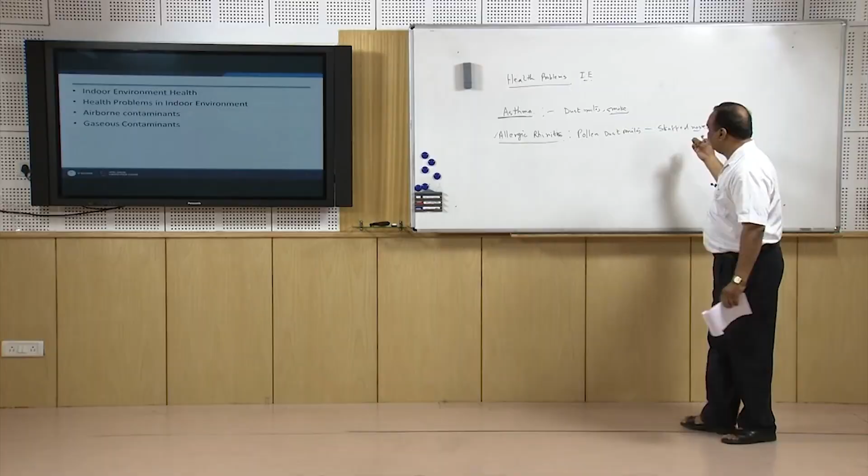Another is allergic rhinitis. This is also caused by pollen and dust mite. In this disease there is a stuffed nose. You must have observed that sometimes when you are sitting in an air conditioning environment, you have a stuffed nose. When you go out, things become okay.

Now the third one is contact dermatitis. In this disease, there is dry skin and itching, and scales on the skin are formed. So this type of disease also may take place if the indoor environment is not healthy. In addition to this, eye and nasal irritation.

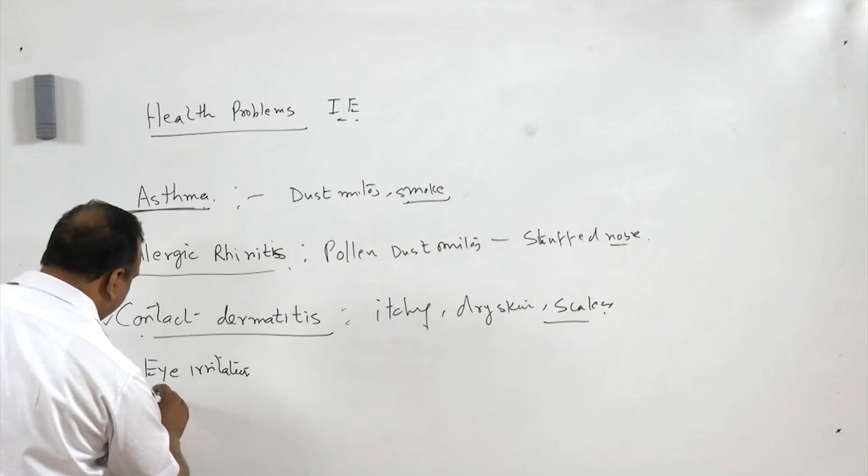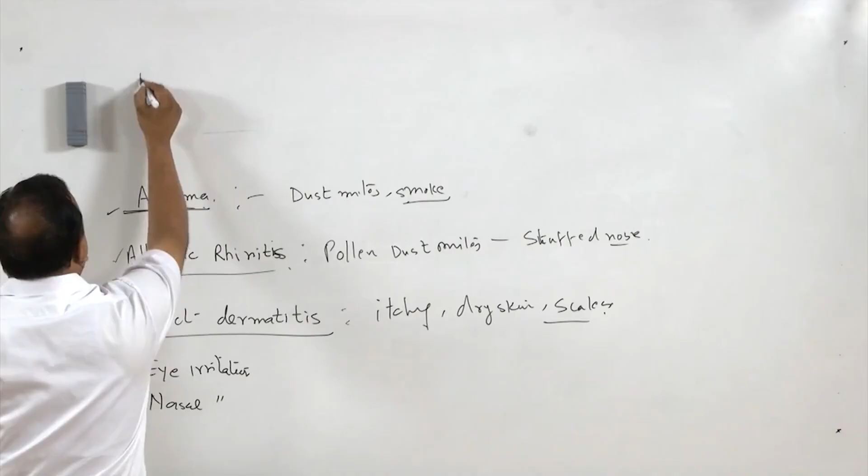Further, there is a disease which is known as Legionnaires' disease. This spreads through bacteria and it has pneumonia-like symptoms. It's a serious, deadly type of disease, with symptoms like pneumonia and fever. Organ dysfunction can also take place, and this is due to the bacteria.

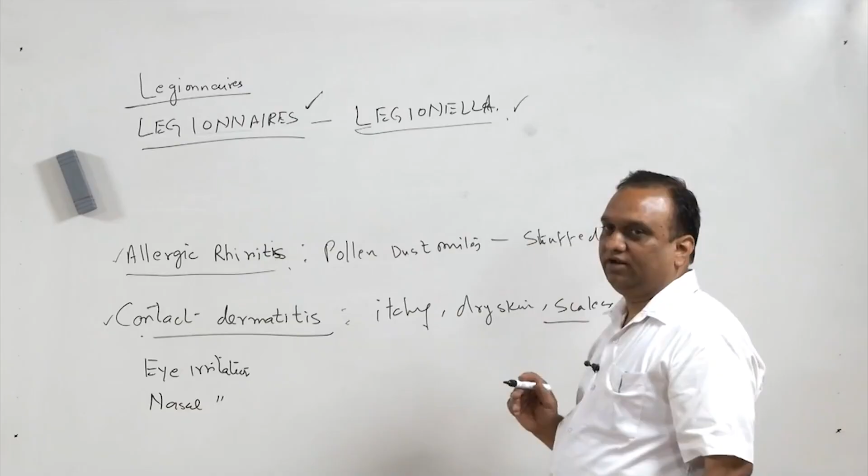This bacteria grows in fresh water. So the favorable ground for this bacteria is condensate water in the air conditioner or in the cooling tower, especially in the centralized cooling system, where a number of cooling towers are used for cooling water in a condenser. There also this bacteria can develop, and infection with this bacteria causes this disease, with high fever and organ dysfunction.

Now, in addition to this, there is Pontiac fever also. Pontiac fever is a flu-like illness. When you are sitting in the environment, you feel that you have been infected with the flu. These are some of the diseases, not all, which you may catch when you are sitting in a controlled environment.

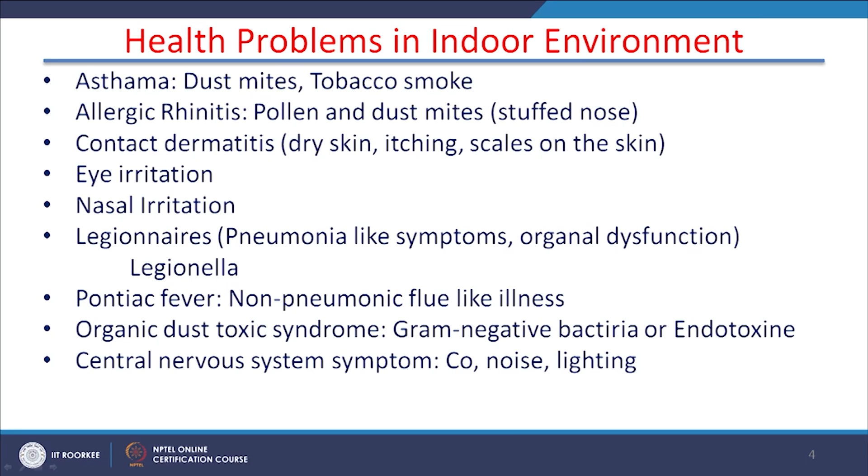So you, as a person, should know about these diseases because they come from the controlled environment. Sometimes we catch some disease, but the source is not known to us. For these diseases, the controlled environment can be one of the sources. Now there are a number of contaminants in the controlled environment which affect environment health, and number one is airborne contaminants.

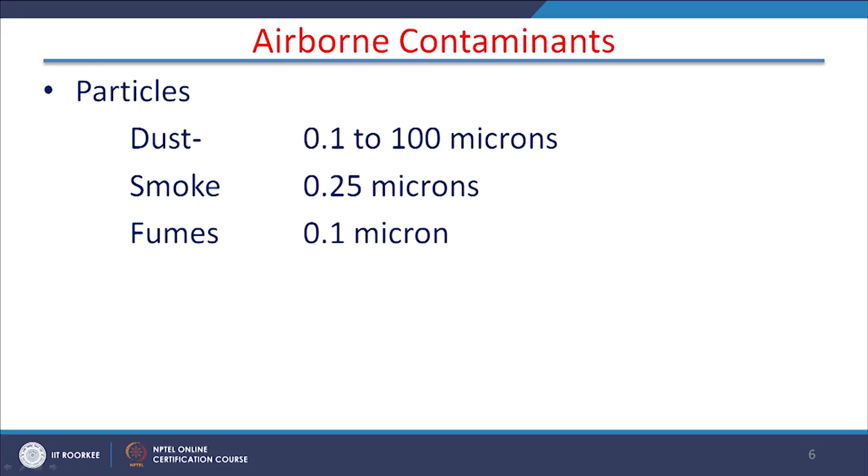Airborne contaminants are spread through the air. They are particles of dust, normally ranging from 0.1 to 100 microns. Smoke particle size is approximately 25 microns. A micron is 10 to the power minus 6 meter. And fumes, the size of the fumes is approximately 0.1 micron.

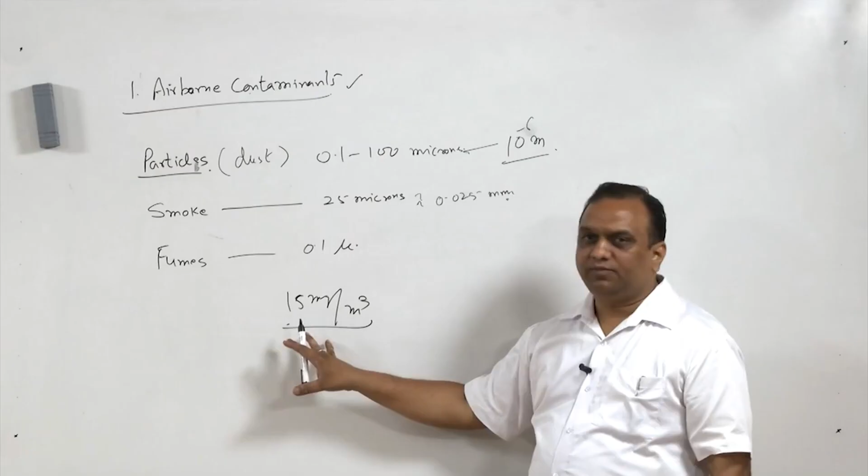Now dust is the major constituent of airborne contaminants, and the maximum permissible amount of dust which one can take in with breathing is approximately 15 mg per meter cube. Actually air should be dust free, but if you want dust free air, a lot of arrangements have to be made. Then you will have to go for clean air and filters have to be provided.

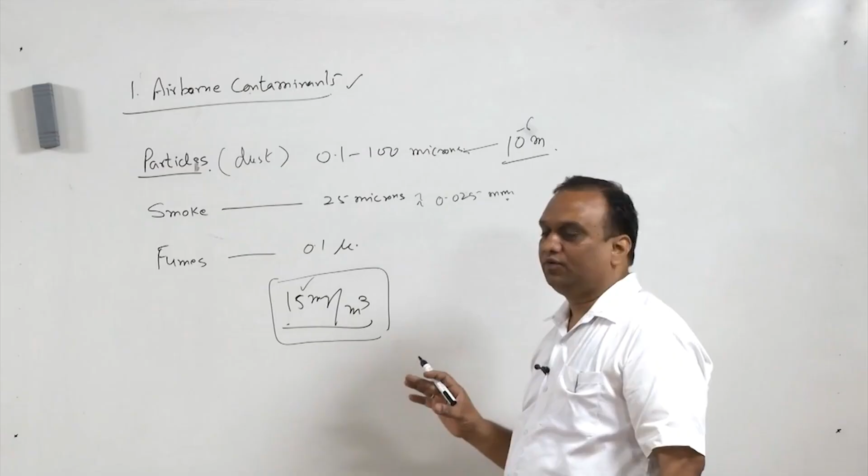But if the presence of dust is less than approximately 15 milligrams per meter cube of air, it is acceptable for normal air conditioning, not the special type of controlled environment. Bioaerosols are also there.

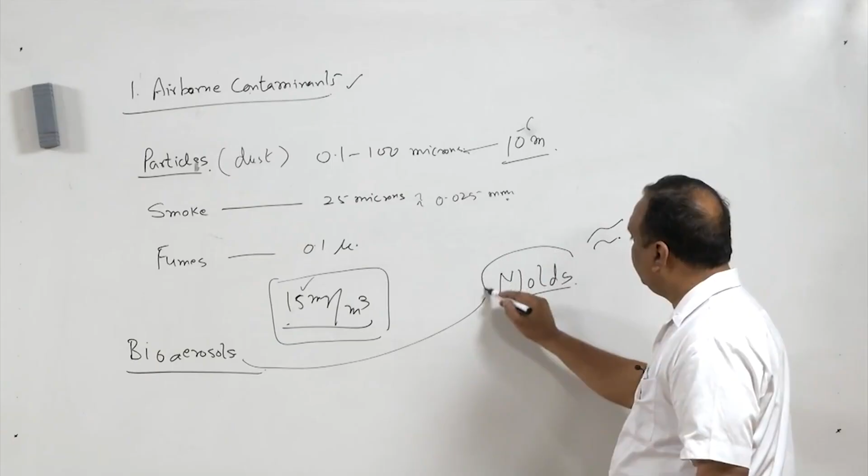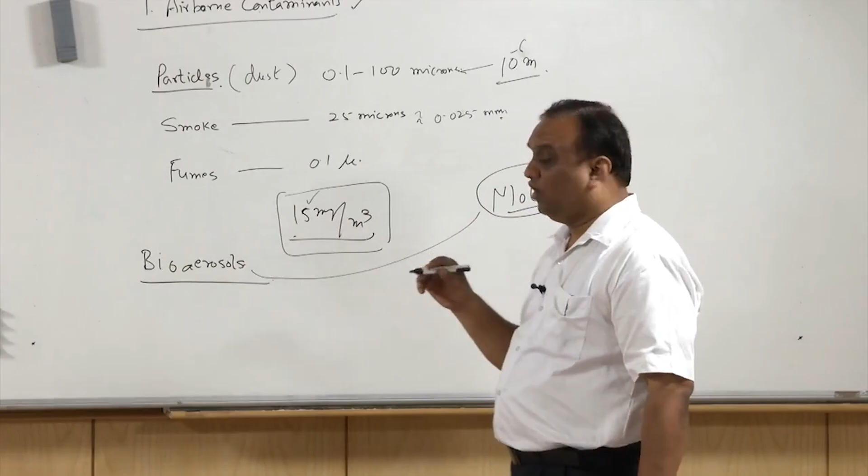In this bioaerosol comes the molds. Mold is a major problem in air conditioned systems. It is a sort of fungus which has a filamentous structure, and it develops in confined spaces, air conditioned spaces. You must have also seen in those systems which are centrally air conditioned and air conditioned for a long time, along the wall or in many places or inside the duct also, the mold develops. So this is a very common problem in air conditioning systems.

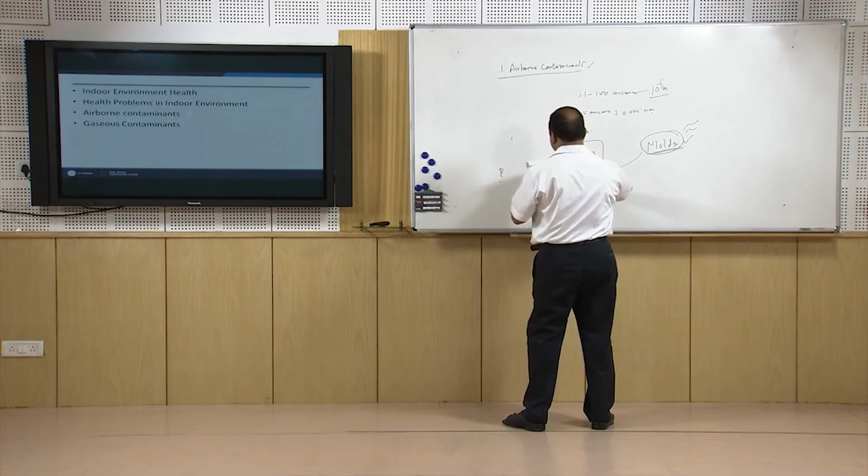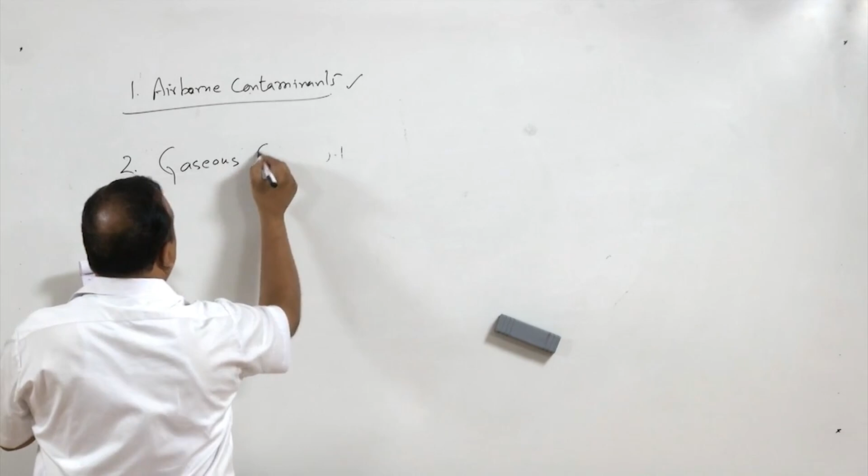So these airborne particles consist of bacteria, fungi, protozoa, algae, and combinations of these. Now after airborne contaminants, there are gaseous contaminants which affect indoor environment health. Gaseous contaminants. Now gaseous contaminants are mainly VOC, that is volatile organic compounds. Now, volatile organic compounds are very harmful to human health, right?

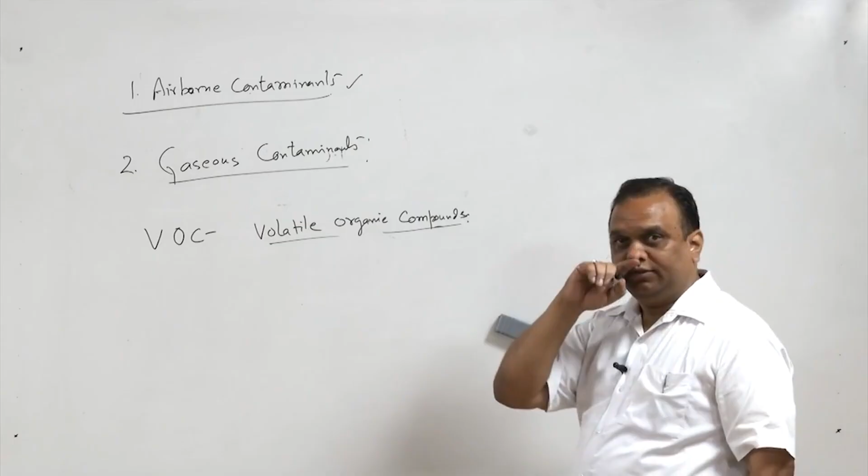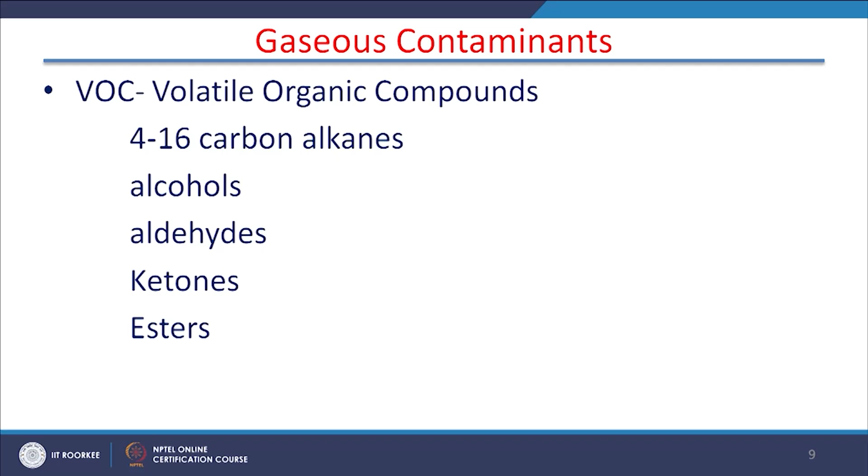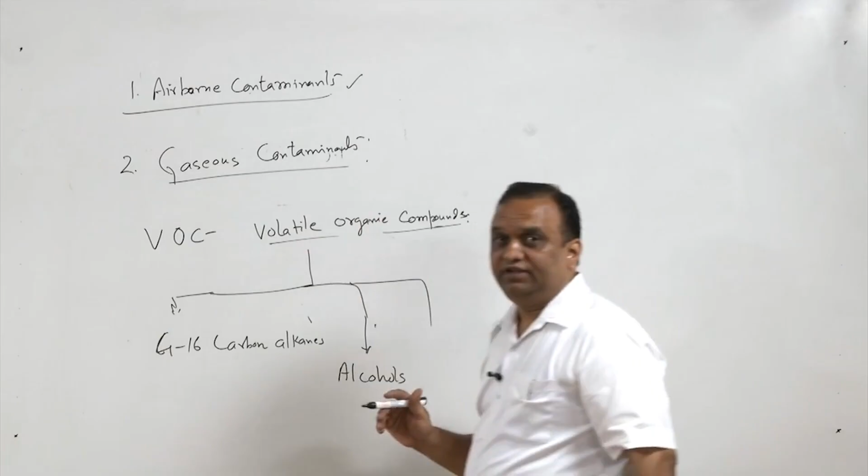So, in any building, especially where a source of volatile organic compounds is there, they have to be removed. They make the air sick, and a number of volatile compounds, for example, 4 to 16 carbon alkanes, different types of organic alkanes, alcohols, aldehydes, ketones, esters. So there are many organic compounds, and when the vapors of these volatile compounds are mixed with the room air, it affects the quality of air which is being circulated in the room.

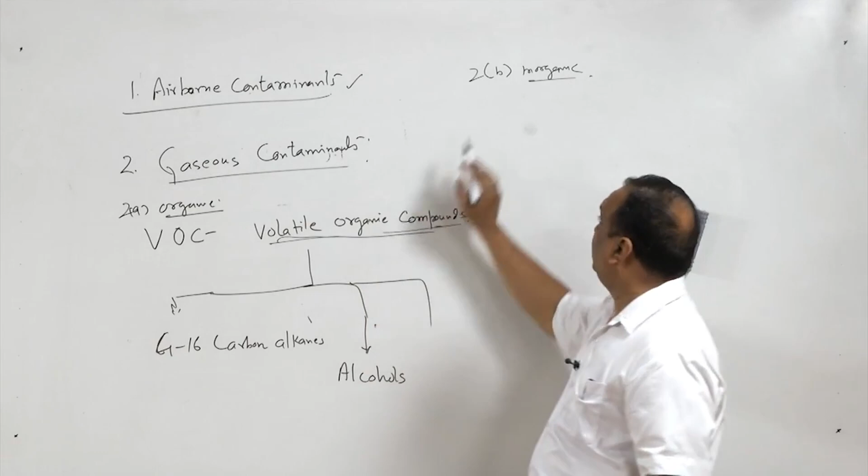Now, the second one is gaseous air contaminants, inorganic. Now, the gases: 2A, these are organic, and some are inorganic gaseous compounds, so 2B inorganic. So, organic gaseous compounds, that is the volatile organic compounds. Then inorganic: the first and foremost is carbon monoxide, ammonia, carbon dioxide, ozone, sulfur dioxide, and many more.

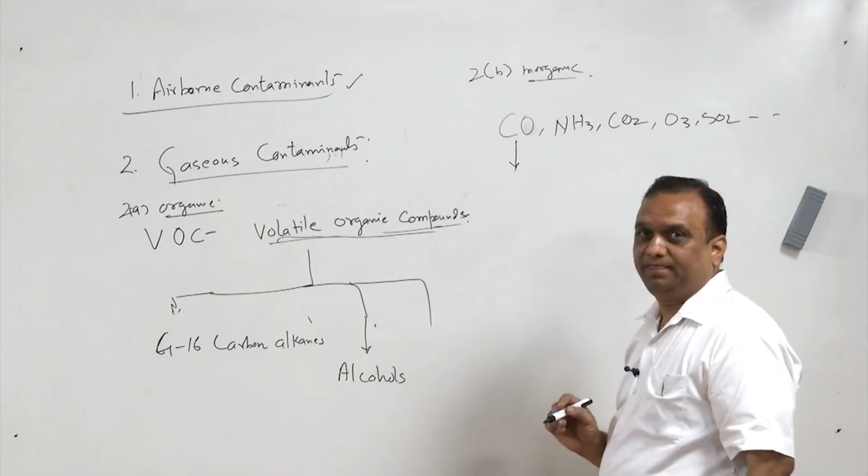Now, carbon monoxide is an odorless and colorless gas, and the permissible concentration of carbon monoxide is 50 ppm, parts per million. So, carbon monoxide in the air should not be more than 50 ppm. Carbon dioxide can go up to 400 to 500 ppm, and it can go up to 700 also. Outside air nowadays in metropolitan cities is quite polluted, so it can go, but in any case it should not exceed 1000 ppm, because at 1000 ppm it will affect the health of the indoor environment and make the air sick inside the room.

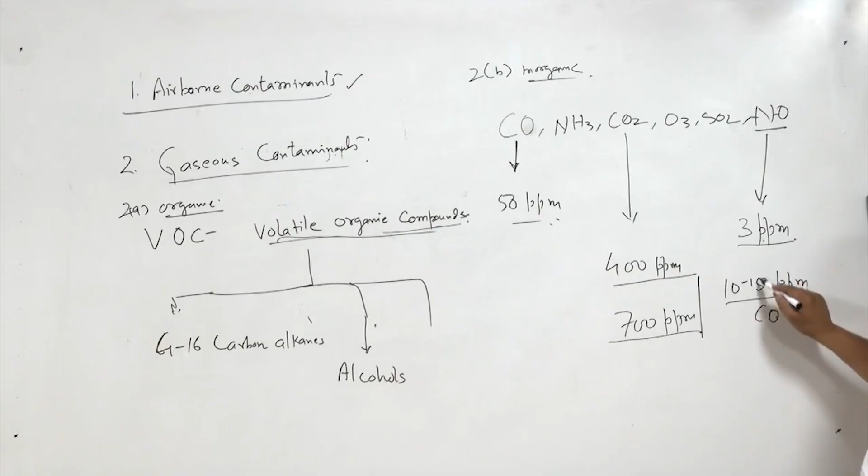Now, one inorganic compound is nitrous oxide. If there is 3 ppm of nitrous oxide, then it is equivalent to an exposure of 10 to 15 ppm carbon monoxide. So, it is more fatal than carbon monoxide, we can say 5 times. Only 3 ppm is permitted; for carbon monoxide, it is equivalent to 10 to 15 ppm.

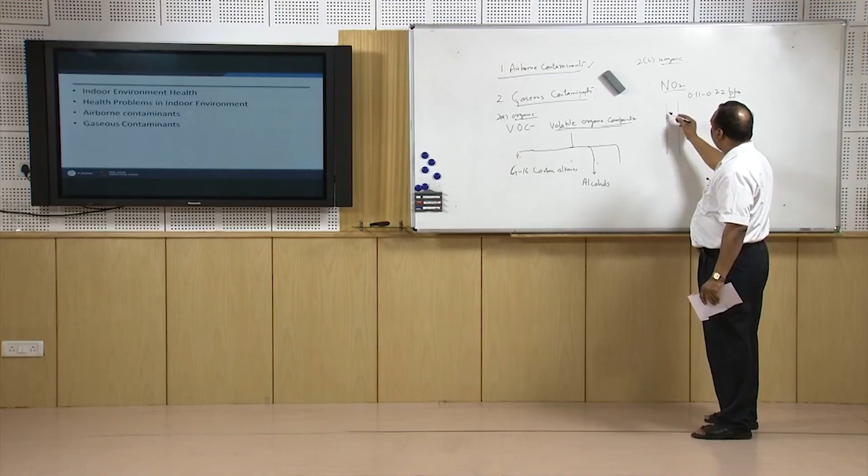Nitrogen dioxide is also one of the inorganic gaseous air contaminants. The nitrogen dioxide threshold is between 0.11 to 0.22 ppm. It is not soluble in water. So, when nitrogen dioxide is inhaled, it is not absorbed by the walls of the air pipe. It goes deep into the lungs, and it has a delayed respiratory response. So, suppose you inhale nitrogen dioxide, the respiratory response will be delayed, because it is not absorbed by the air pipe. But if it settles in the lungs, it will show symptoms of delayed respiratory response.

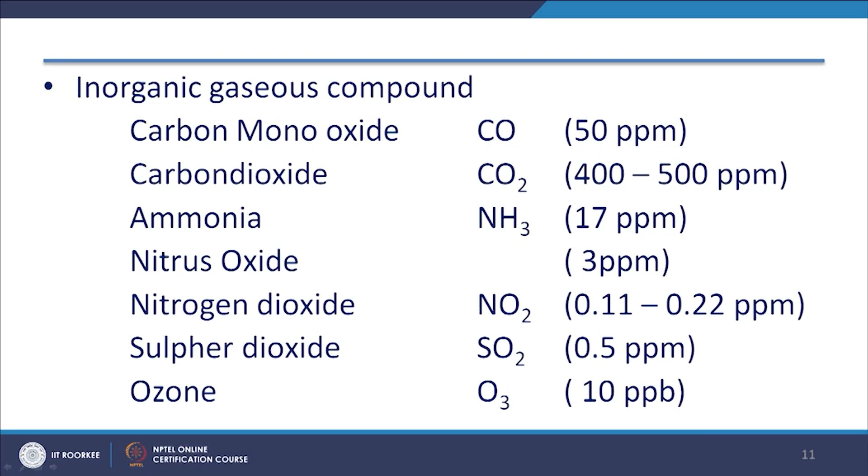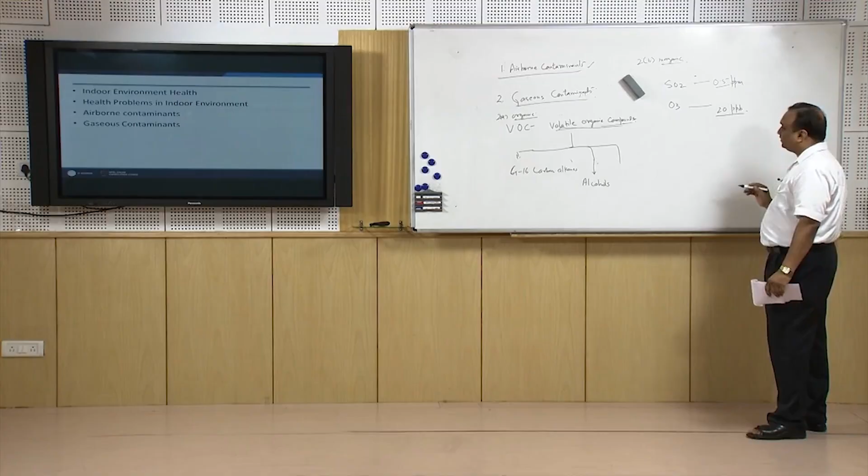Now, other gases, that is sulfur dioxide and ozone. Sulfur dioxide is permissible at not more than 0.5 ppm. For ozone, it is very interesting that it should not exceed 20 parts per billion. So, ozone is also a very dangerous gas. At 20 ppb it becomes fatal; that is why it should be below 10 ppb. So these are certain chemicals which create health problems or pollute the indoor environment.

Now in addition to these airborne and gaseous particles, electric hazards are also there. Electric hazard. This has to be taken care of in the building. 100 milliamperes, this is an interesting figure. If 100 milliamperes of current is passed through the heart for 2 seconds, fibrillation of the heart will take place, or the heart muscles will fibrillate.

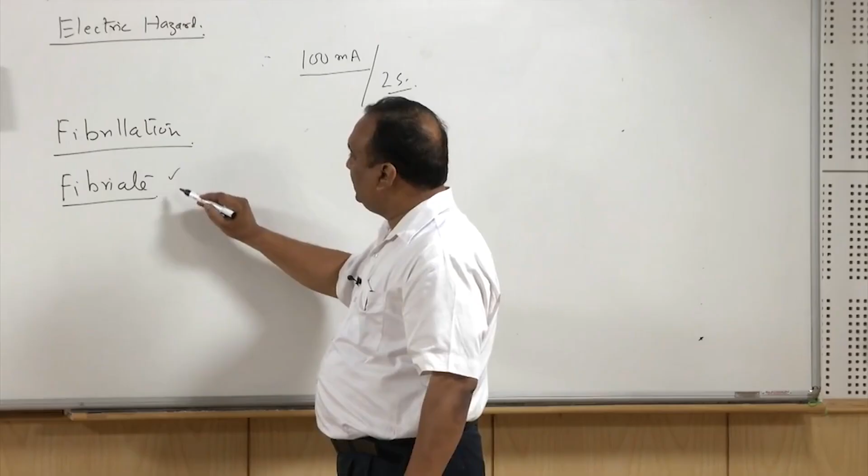Fibrillation means the muscles will strain with each other, and the heartbeat and pulse will go out of rhythm. And this happens with the ventricle of the heart. Ventricle is the lower part of the heart which pumps the blood in the body. So when the pulse and the heartbeat go out of rhythm, the pumping problem arises, and that is a very serious situation, and this can be fatal also.

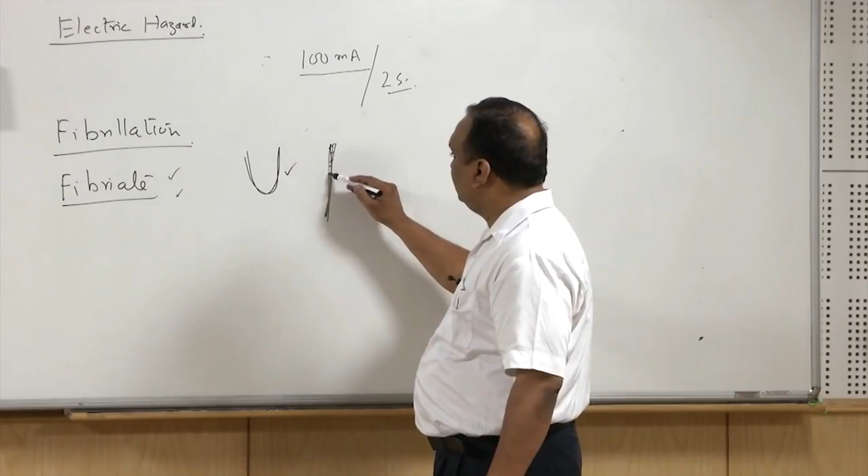Now second thing is the major part of the electrical resistance, because our body fluid is a saline fluid. So the major part of resistance comes from the skin of an individual. So if skin is wet, its conductivity increases. So care has to be taken in a building, in a confined space, that not only wire but electric fittings also should be properly insulated. Otherwise this may cause a serious problem.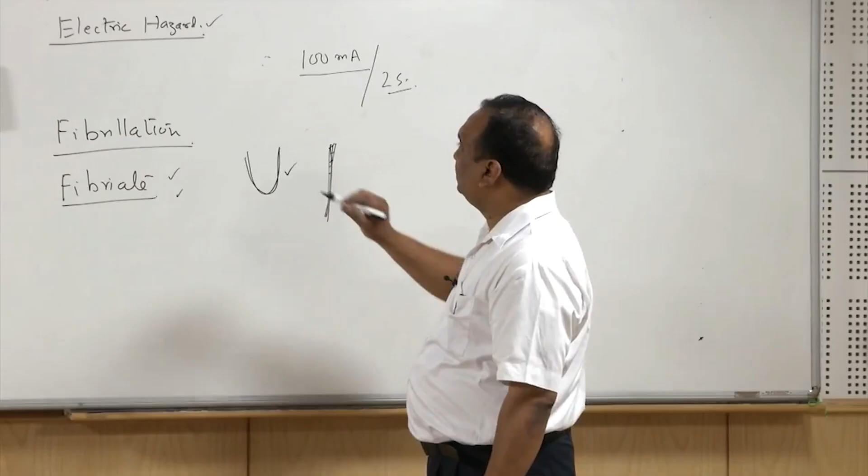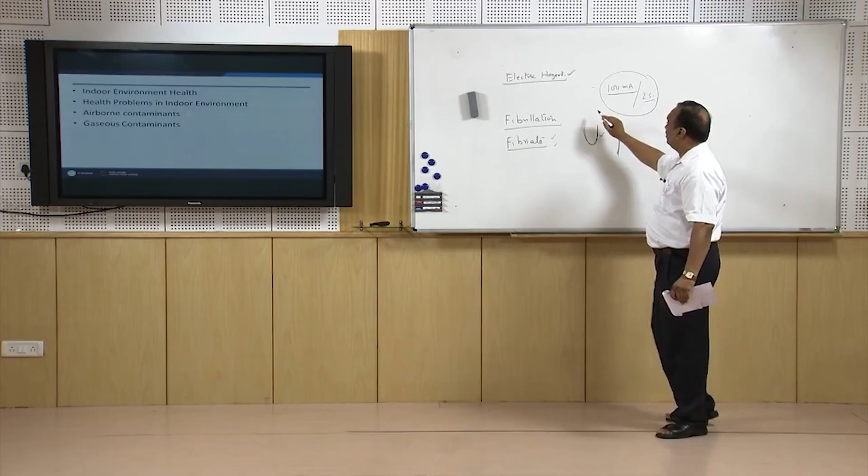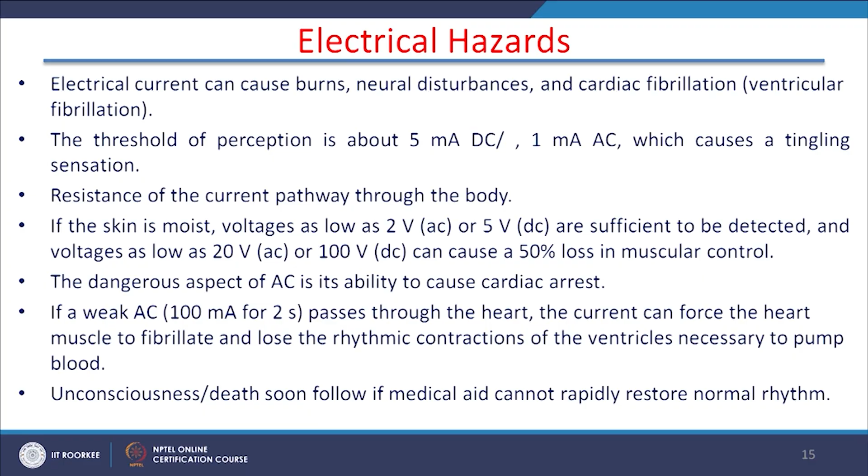So we don't require very high voltage or very high current to be fatal. Even if this much current is passed through the body, from top to bottom, this can cause serious accidents. When your skin resistance is low, even voltage of the order of 2 volt AC and 5 volt DC can be detected from your skin if the skin is wet.

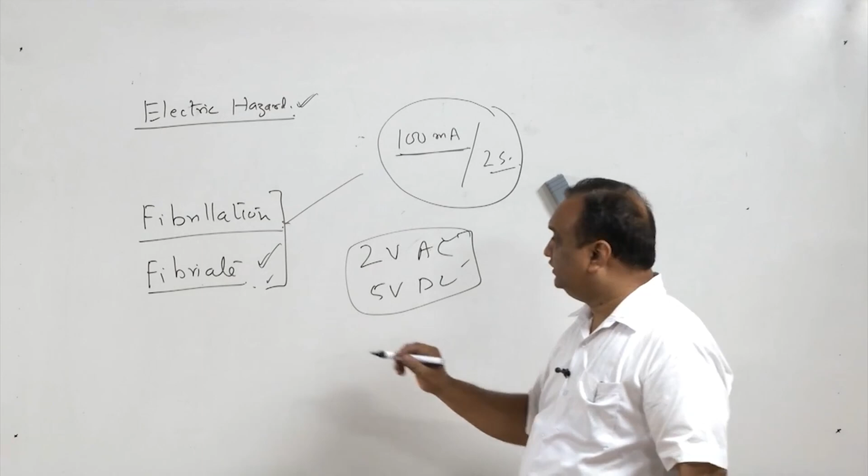So in this case, if the heart fibrillates, proper medical aid is required to be given to the patient. The patient sometimes becomes unconscious, and immediate medical help is required by the patient.

Now in indoor health environment, odor is also one of the factors. Odor in the air. Sometimes you enter a closed environment, the temperature is okay, humidity is okay, air movement is okay, level of oxygen, everything is okay. But if odor is there, you don't feel comfortable. Now this odor is due to ammonia and hydrogen sulfide normally, and some of the VOCs, volatile organic compounds, add to the odor in the system. So in any system, a minimum level of ventilation is required to remove the odor from the system.

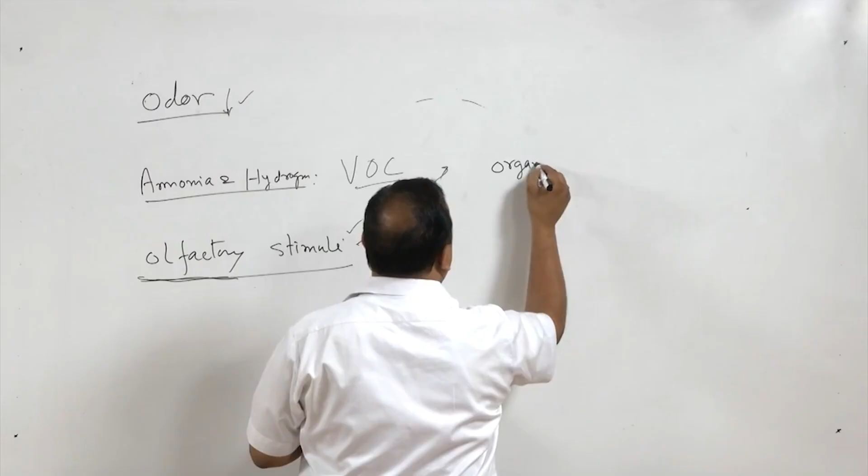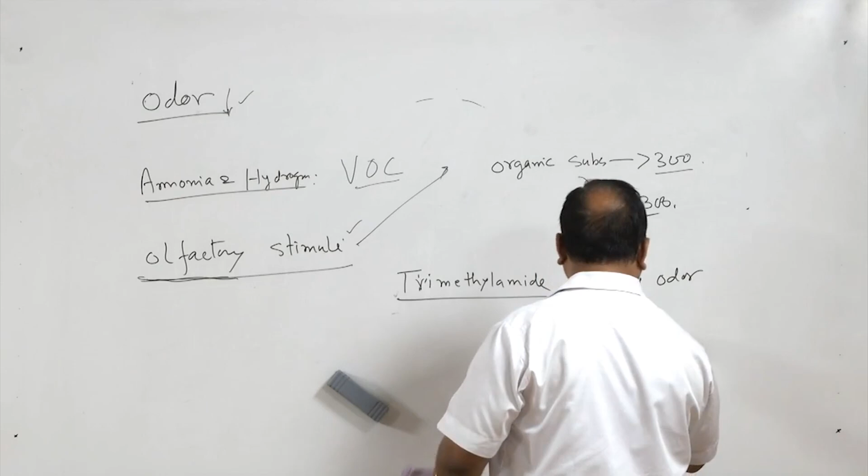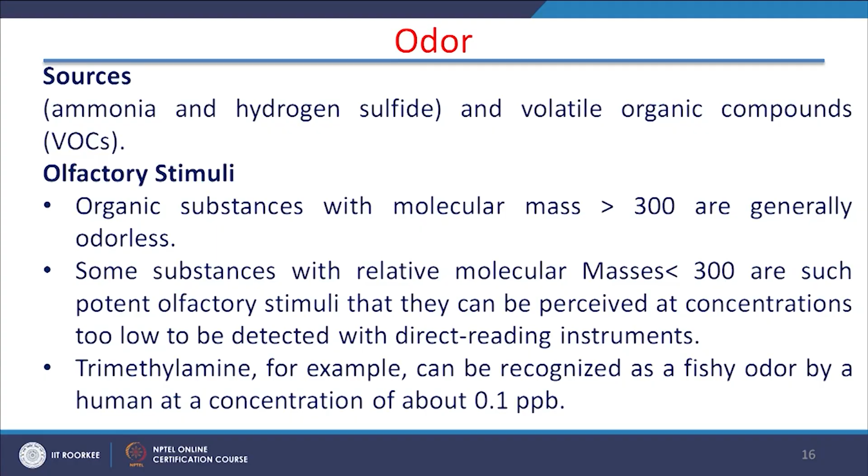There is a chemical, trimethylamine, and it gives the feeling of fishy odor at a concentration of 0.1 ppb, parts per billion. So at such a low concentration, this chemical will give fishy odor. Like this, there are a number of chemicals. It is possible that some such chemicals are mixed in the air, but in any case, in order to get over this problem of odor, a certain level of ventilation has to be maintained in the building. There is a threshold value in ppm for chemicals regarding the odor.

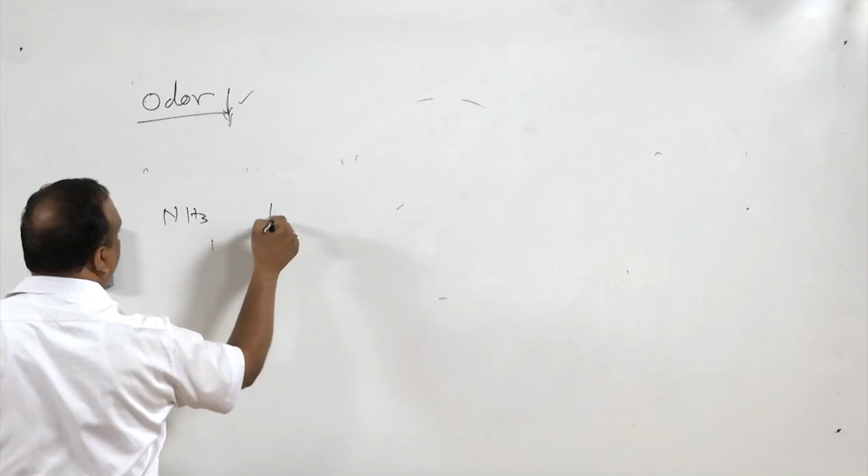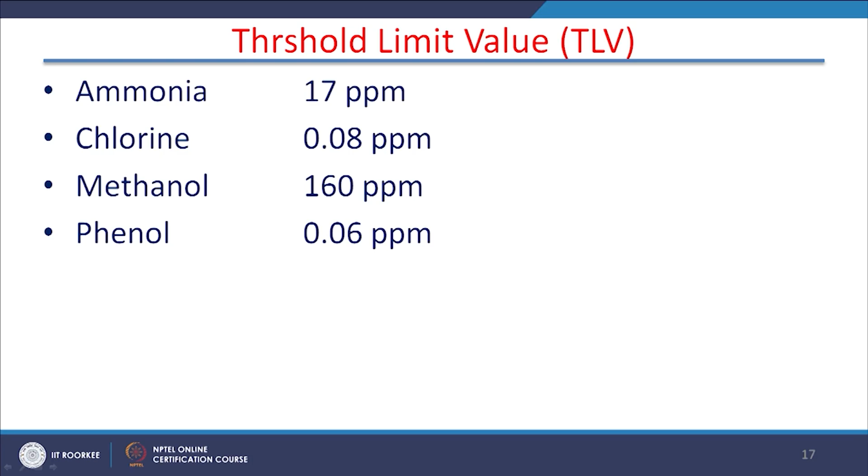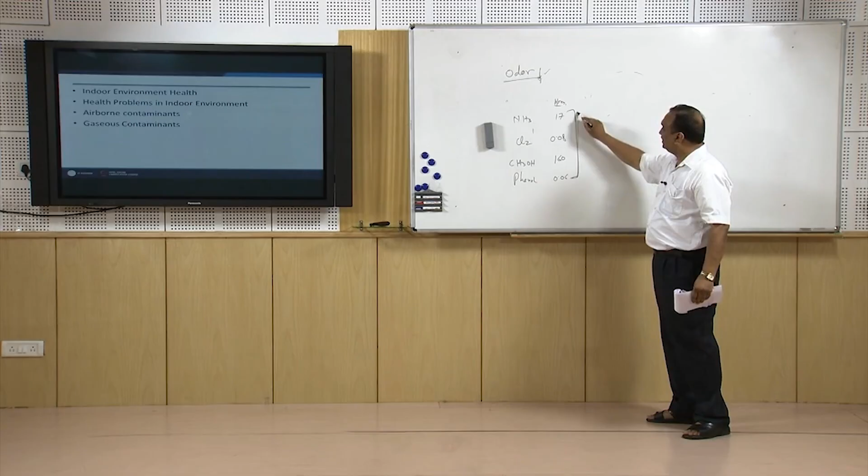For example, ammonia has to be less than 17 ppm in the air. If it is more than 17 ppm, you can feel the pungent smell of ammonia. Chlorine has to be 0.08. Methanol, CH3OH, has to be 160 ppm. If it is more than 160 ppm, you can feel the odor. Phenol, 0.06. Likewise, for all possible chemicals, there is some threshold value. So if the presence of these chemicals in the atmosphere is less than these values, you will not feel the odor of these chemicals.

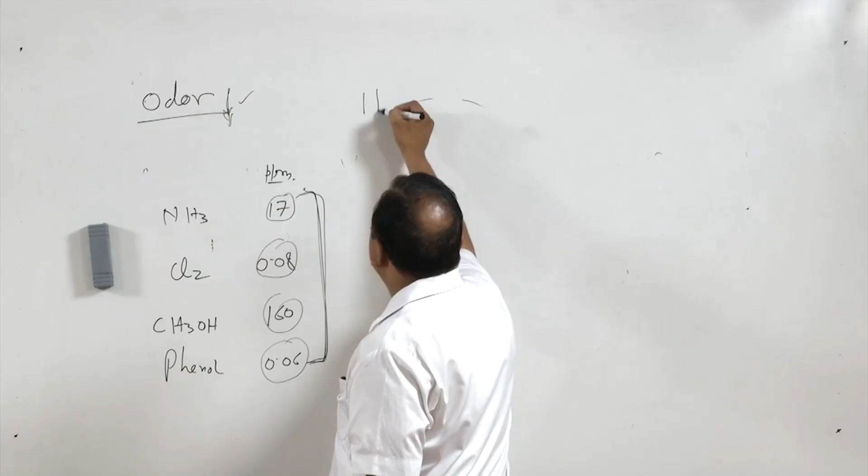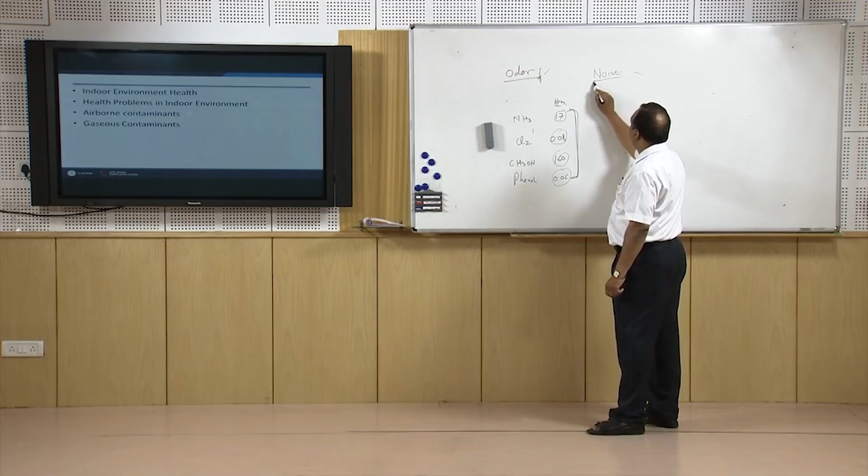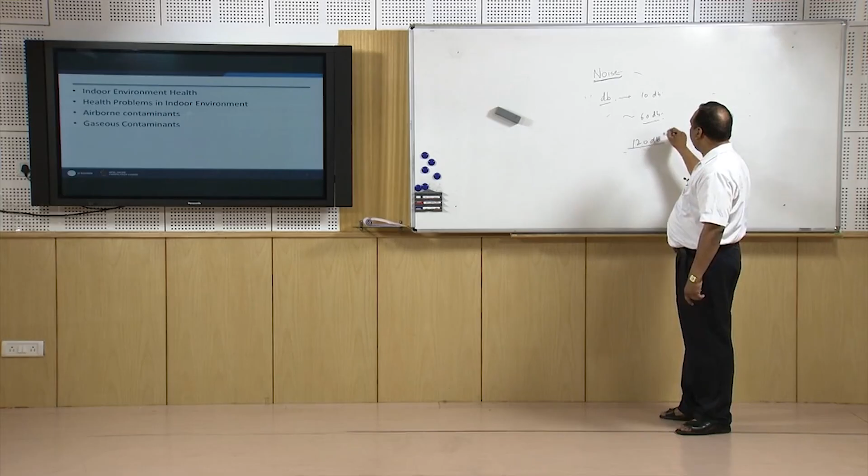Another thing which disturbs indoor environment health is noise. Even if the temperature, humidity, air movement, even odor is controlled, if noise is there in the occupancy, you will not feel comfortable. Noise is expressed in terms of decibels. To give you some idea, if somebody whispers, it is approximately 10 decibels. When I am talking in this room, the sound may be of the order of 60 decibels, but the moment you reach 100 or 120 decibels, it is a logarithmic scale, so at 120 decibels it becomes unbearable. It becomes like a jet noise.

Noise of 140 decibels can damage the ear. High decibel noise can even damage your skin, your heart, and affect the respiratory system. These orders of noise are not there in air conditioning systems, but the noise level should not be more than 40 or 50 decibels, so that the occupants remain in a state of comfort.

This is all for today's lecture. Tomorrow again we will take indoor environment health.